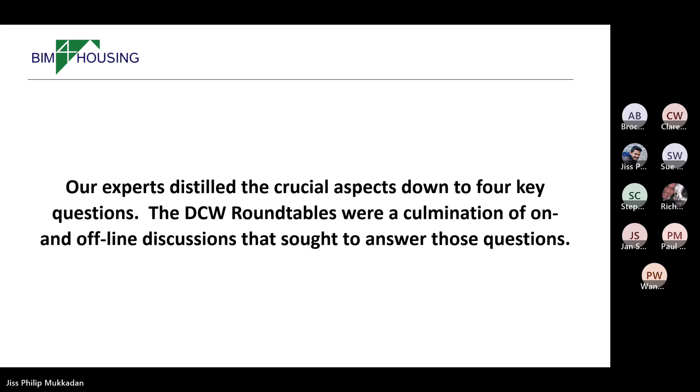Is anyone here at Digital Construction Week? I know you were there, Steve. Was anyone else there on the day? Someone's saying yeah... no I wasn't. Oh good, I was there. Perfect.

It's my screen now. I can see it, that's good.

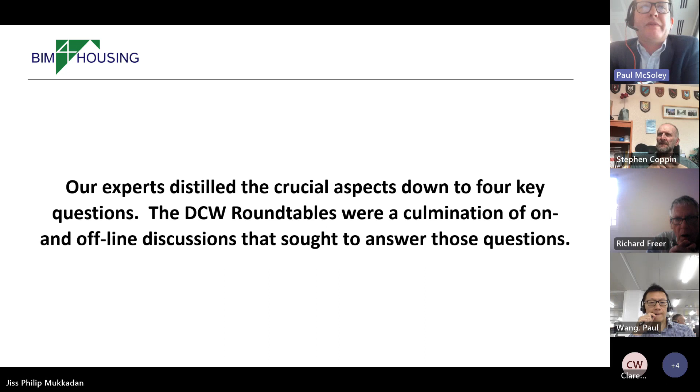So hopefully you got something out of it as well, because I did a little presentation which I'll bring up after we've gone through this, just to give you a bit of a sense of where some of the other stuff's heading. If you go to the next slide, Jiss.

Again, it was how do we prevent incorrect design, selection, installation of fire safety products.

If you go to the next slide again, Jiss, because I'm trying to work with the order you had these in. That's it. You see how different tables - well, there's Paul White's one there. Have you got the table?

Davey's got them here, all the different tables. Yeah, he's got a picture of each table as he comes to the question. Yeah I didn't know if he had. Okay, thank you Richard, just refreshing me. Sorry mate, I'm head down. No, not at all.

Just to be clear, there was much discussion in the pre-DCW meetings, and everything was distilled down to 4 questions, that was it. Each table answered a question. But also there was a lot of input prior to that - we had a survey online that people were filling out. So that has all been distilled into this document.

So this is the table answering the first question - they're the people who were doing it. Sorry Paul, carry on. No, that's all good, because George went through it the other day. Obviously George's not here today anyway, so it's fine.

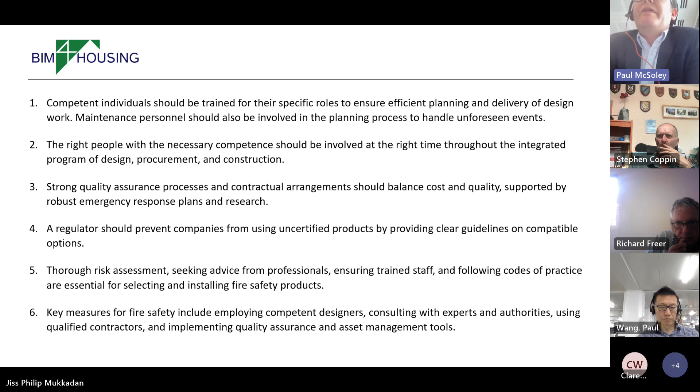Oh it's more here, just go back to the beginning. Oh bloody hell, they've got like 22 outputs. God, go back to the beginning. Yeah, Jesus, a lot there. Go back to the beginning slides if you can.

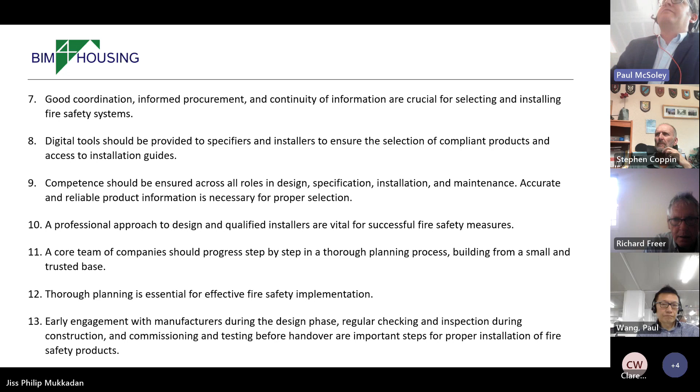That's that one there - how do we prevent incorrect design, selection, installation of fire safety products? One of the things with this is: do we think, as a construction group, that the designers - the architects, the building services engineers, the fire engineers - actually understand the fire safety properties of products in the first instance?

That's the question - not all of them by any chance, without a fire engineer supporting them. Well, even the fire engineers, do you think they understand all the product classifications, the 54 items for a smoke control system they need to classify for products? The answer is probably no. Yeah, I agree, so it's a bit of an interesting dynamic.

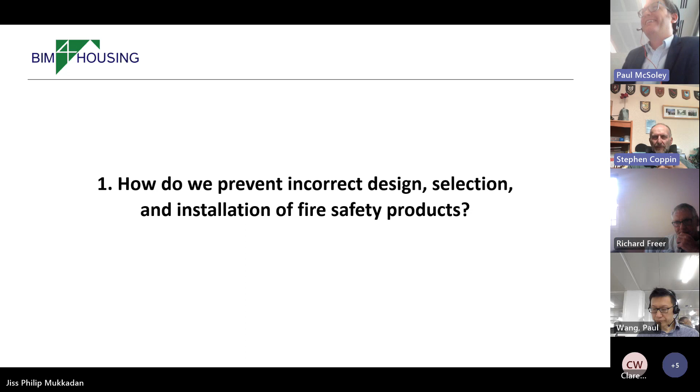If you crack on a bit as well, go forward again, we'll look at the other questions that are there.

So if you go onto the group for this one here quickly - assets should be entered early into the common data environment asset management tool, linking data request information to assets using unique identifier. Understand the information needs of the end user. Implement the golden thread principles, ensuring suitable business systems, process, and clarifying ownership and responsibility around AI.

Yeah, you know, my biggest thing is that if you look at the golden thread for any selection of piece of equipment, it's building risk, space risk, how it's supposed to operate, how it's classified, what wall it goes in, and how you install it before you even get to the quality assurance of the installation part of it. So if all those bits aren't available in BIM, this is the point

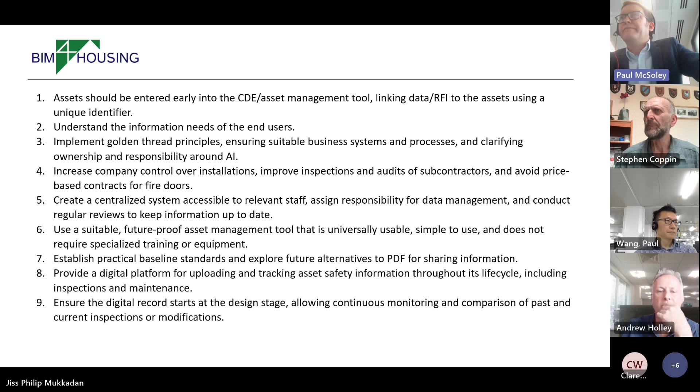If you look at all this stuff around digital records, it's no good taking a picture of something on site and saying that door's installed perfectly as specified, when actually it's been specified incorrectly, or it's the wrong function for the space risk it's doing. All you've done is recorded a perfectly good door in the wrong location.

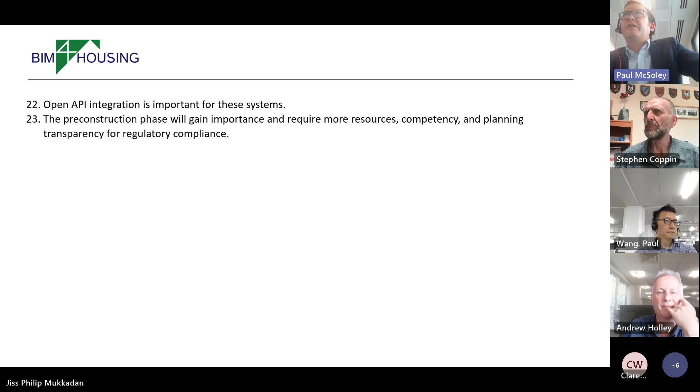Go onto the next question for us. You can all read, we'll get this out. This hasn't been sent out, Richard. We'll send it out, there's loads of things here to read through, and we're not making it into a presentation, Paul. Make it up into a report and get it out to everybody, and as you say, it'll be on the black box.

That's good. If you haven't seen them, we've got the individual product workshops coming up as well. How do we ensure the building safety data is live and not an outdated snapshot in time?

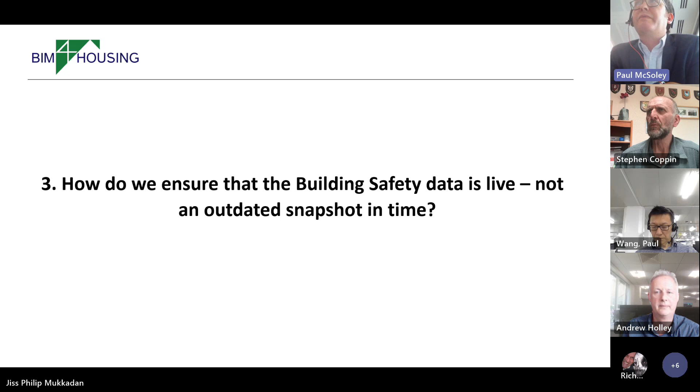If you go onto the table quickly, see who's on that table, just to refresh my brain. Okay, so you've got Candle on there as well, and Scott Brownrigg. Animatic's great anyway, if we don't know it, Anna. If you go to the next page, let's look at some of the output from it.

A robust change management process should be followed throughout the entire project. I'll be frank, forgetting the Fire Safety Act, general change management on jobs isn't necessarily done very well anyway, because when you look at changing componentry to be adequate for the function it's supposed to work against, you can sometimes find the dreaded word of VE comes into change management, going from A to B, but actually A was never right in the first place. So you end up with a B that's hopefully right, but sometimes you end up going to something that's completely wrong, more wrong than the first one. So the change management process needs to be robust, with the right level of competency and input to get it right.

Design a comprehensive soft landing approach. Love the word soft landing, including defining information scope, ownership, and process for updating and managing the information. If you looked at soft landings in relation to energy, it's about how you think the energy was going to be when you purchased the building, so how many kilowatt hours per metre squared, and the reality after is managing that difference between the two, because it's a combination of how you occupy the building.

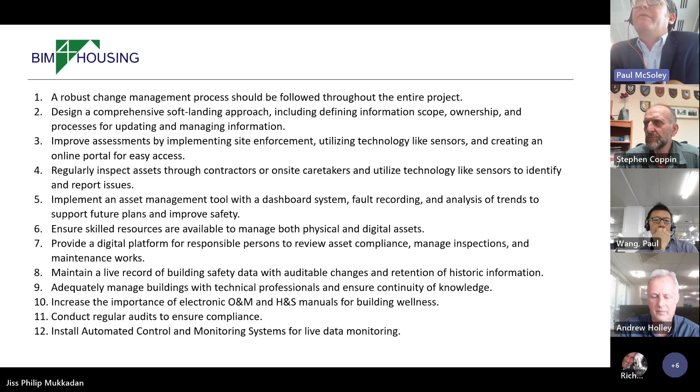If you go to the next question for me, Jiss, because there's loads of these here.

If you go to the next one for me - how do we ensure that the incomplete building services? Does this design not impact construction? I can't get it, is that actually written right? How do we ensure that the incomplete building services, okay, design does not influence - okay, so this is the table I was on anyway. This doesn't read right, building services design, not... it's building services design, not.

Okay, so if you go to the outputs in this, we had design of a building should be complete before construction to avoid mistakes and uninformed decisions. I think we'd all probably agree with that one. Design changes should be minimal to prevent budget overspends.

Rethinking procurement process can help ensure a smoother transition from design to construction. That's what you said earlier, Richard. Everyone says the same thing. You need that specialist help early on in the process, which is no different to what's in the David Mosley report on procurement. Utilising 3D modelling, conducting gap analysis, detailed construction planning, engaging stakeholders timely can enhance the construction process.

Again, 3D modeling can help, but the risk with 3D modeling is that you've got to model the actual functionality of the whole product, all the seals that go with it on the wall, and how the wall works to get it right. Clash detection 3D modeling isn't as simple as the pipes touching the wall, etc. There's a bit more to it.

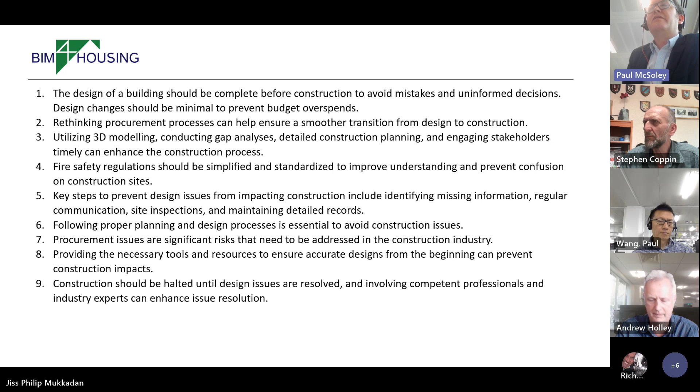Going to the next page, let's see if there's anything else that's been written on there. I don't think there is. Oh, there's a few more. Lack of coordination between build and M&E design can lead to compromise and potential dangers.

And that's probably the big one, because all the products in one wall, the wall must be correct to house all of those products as a system. Not just put a wall in - you've got to make the products work with it, because that just never happens, unfortunately.

And information - someone mentioned on the dashboard - information flow is critical. Do we pass information between the relevant people at the right time to actually understand the decisions that need to be made in like a RACI format, to get to the right decision that you require, because there's different knowledge holders. Again, the complexity of our information is often underestimated.

That's the point I made on the day - when you look at the information required for one door in one location, it isn't just FD30, FD60, or wherever it is. It's a bit more than that. People hear 'doors' but it's more complicated because of the function, the security, and the DDA requirements as well.

So there's a tendency to overvalue the market at later stages of the project process, undervaluing the importance of information and products at the early stages. And that I think is a brilliant point as well.

Has anyone else got any questions on these before I move on? Everyone got any viewpoints? Silence.

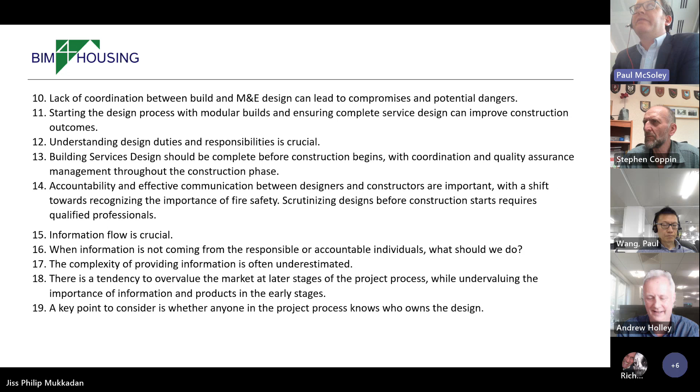One of the things we shared on the day was this. Has anyone seen this before?

I've not seen that before. No? Okay, Paul, have you seen it before as well? No, I've never seen this one before. Okay, so for those who were there, we would have seen this probably on the day as well.

What we're trying to do is, because the questions we asked on the day were written, the responses are really good, and when that report's formulated, Richard, we'll have a good chomp through all of it. George did a diagram originally around the gateway points at the top - when should gateway 1 be, gateway 2, and gateway 3 - because when you look at how the regulator's going to operate, we've all got different knowledge around what the regulators are apparently doing and what their view on the gateway stages are.

One of the big things is they're probably going to allow - it's always been on the government site - phased approaches for handing information over, which to me is probably one of the biggest risks, because how you coordinate all these products together into a system approach is where the breakdown occurs. For me, it's always been about knowledge holders.

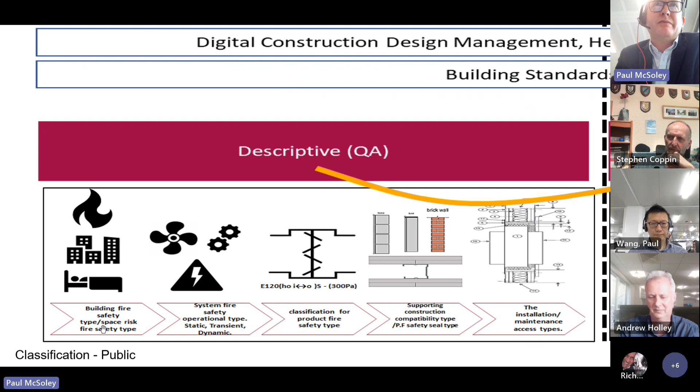To be a bit controversial, I'm not sure bringing the supply chain in fixes all of it just yet, unless you get the data in the right order, because the people that supply these kind of products don't do fire risk of space. So this is the disconnect between those five points, which we've got to try and bring back together.

Then you've got to be able to install it as well, get access both sides, clean it. See where I'm going with this, right? So that is a summation of how you get the quality assurance.

And if you've not done that before you go into Gateway 1, you don't know how it fits, you don't know how to access it, you don't know if you've got risers that are big enough. And these are the common things.

I'm sure, Paul, you'll see it on site, Wang, that you'll get to site and you'll have things like steel beams across compartment lines. They've drawn everything going through the steel beams, and you go, you're going below them, mate. You ain't going through them, because it's different test standards.

So it's trying to get a mechanism to drive all of this out and actually have the BIM data eventually that can support it. But I think we're a bit off yet getting those templates done, because you need sort of cross-industry agreement on it.

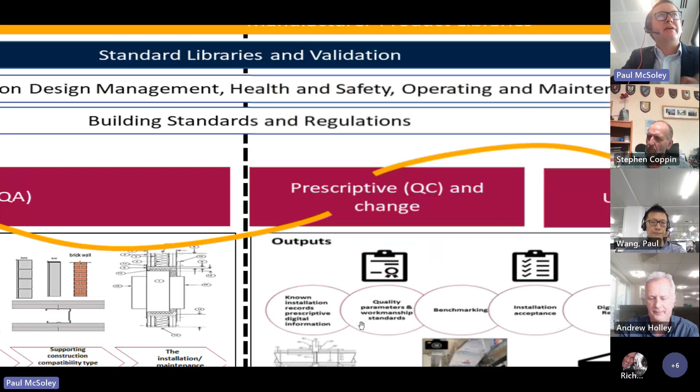But then you look at things like digital records, that's over here, but that's a summation of all of this, isn't it? If I just zoom in a bit, once you know what the product is that you're using to match that, if you go to manufacturing and give them all the information around that, they'll go, this is the product you want to meet that.

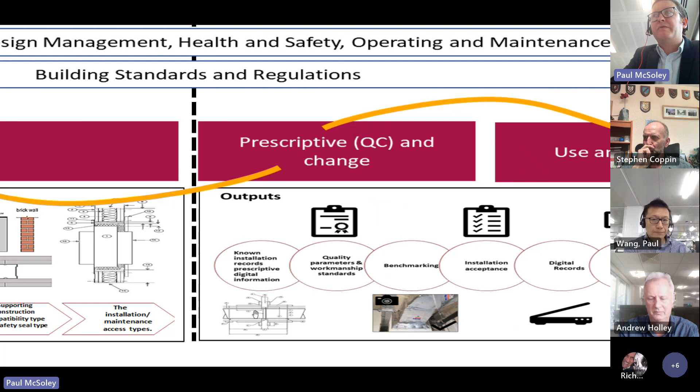Then you've got a known installation prescriptive of how you install it. Then you've got quality parameters and workmanship that goes, you can benchmark it, you can do installation, then you can do a record of actually how it's installed against those products.

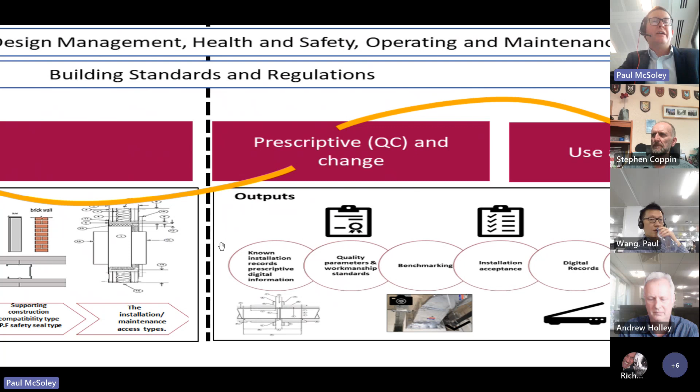That's what we were kind of talking about on the day as well, about how you get to that point. But without this, at this stage, you can't guarantee the fit works, it's the right product, the appropriate space risk has been picked up.

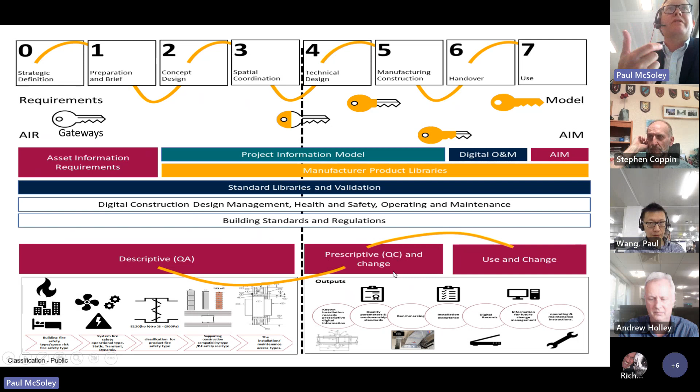We sort of showed it around, like we talk about the change management process, that if you do something that affects this once you've set it to work, then you've got to be in this world of a major change. There's no other way you can kind of look at it. If you change that classification number, that has got to be major, because the ripple effect is huge.

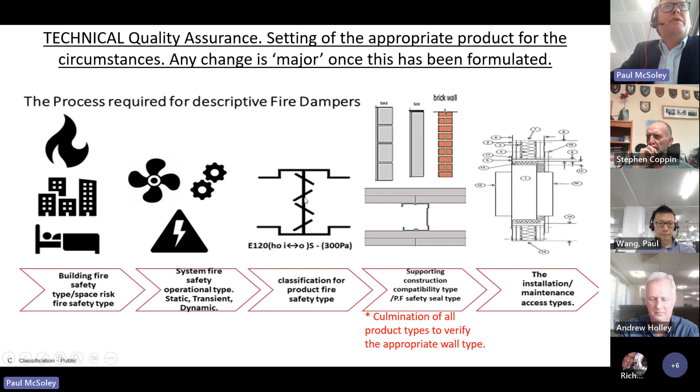Once you've set this around the culmination of the products, you've got to look at the ripple from every single product. So if I display this in a different order, if you set the wall to be brick and block at 140 mil thick around all of these products that go in it, and then you go and change something, you've got to go back and reassess all of this, each one against what you've changed, because unfortunately you might find this affects the product that you've used from the other product types in that wall type.

You mainly see it from drywall to brick, not from brick the other way, to be honest with you. But doors can be a bit of a nuance, because doors have to be tested in both substrates, whereas dampers go from that to that.

Resistant ducts go from that to that, pipe work goes from that to that. Flues, you've got to do both. Curtains, you've got to do both. Busbars, you can go from that to that. So there's all different rule sets around it all. This is the nuance of what we're kind of seeing.

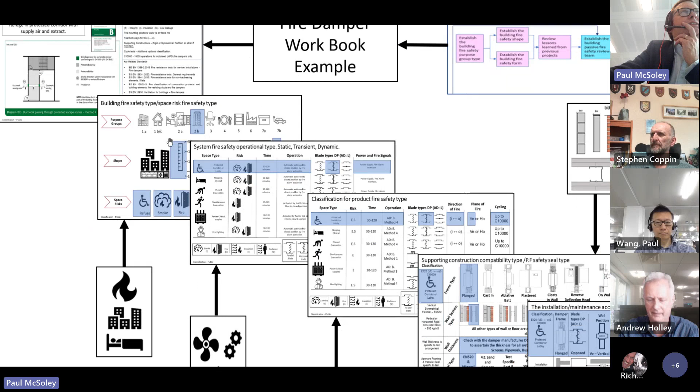We showed this on the day as well. We'll make sure we get this sent out, because this is common knowledge. It's out there from other working groups that are going on. But it was to get a method of helping people and a common process to make things easier to spot about how you handle that information about risk class.

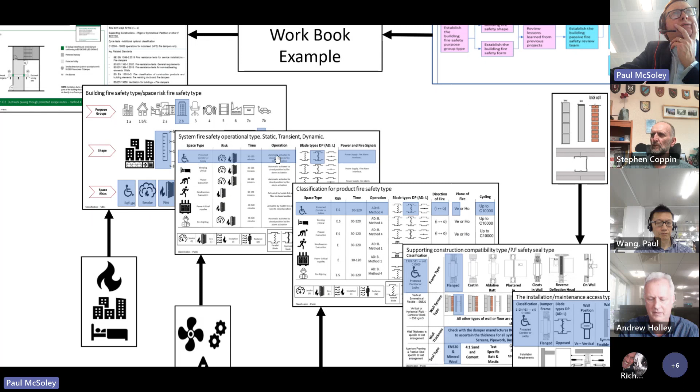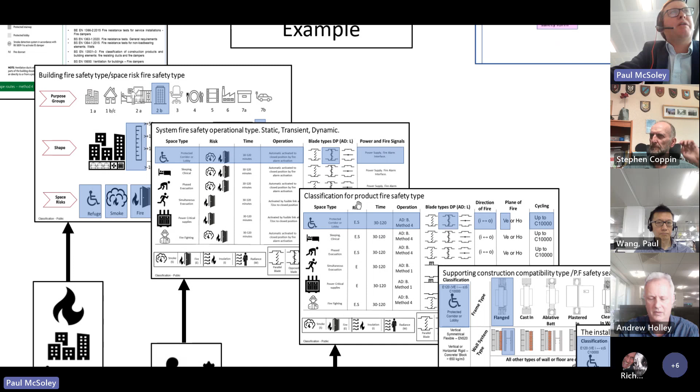What the, if you look at dampers in their inherency, it's all about... Paul, is this your document? Yeah, well, George has got it. We displayed it on the day, mate. You can go in the black box. It's no big drama. Yeah. Do you know what I mean?

But the thing is, what we sort of said is in some of the other industries is that we need a code of practice to get people to handle this information, because as a construction group and a construction industry, I've got a bit of sympathy for architects, building services engineers, fire engineers, and suppliers and contractors.

And I mean, if you look at, we've had another big one that's gone bust recently, haven't we? A big contractor that's gone as well. I forget the name, it wasn't Hill Group, it was a different one. It's just like the endless revolving churn of internal big building contractors that are going under, and it's all going to be in relation to getting wrong products in wrong walls and refitting out and fighting legal cases over it.

So we've got to get to the point where the top understands what they're doing and how they get there. The bottom understands how to verify the adequacy of what they've been asked to install. And the likes of the big contractors in the middle have got a mechanism to help that information get passed around, because I don't think there's one key knowledge holder for any subject, because every subject's going to intertwine at the supporting construction it kind of meets at. So you've got to have a method of doing it.

There's like 7 types of frame types for dampers, and you've got to have a way of installing them. You need access, someone's got to do the seal both sides. You've got breakaway joints, if that makes sense.

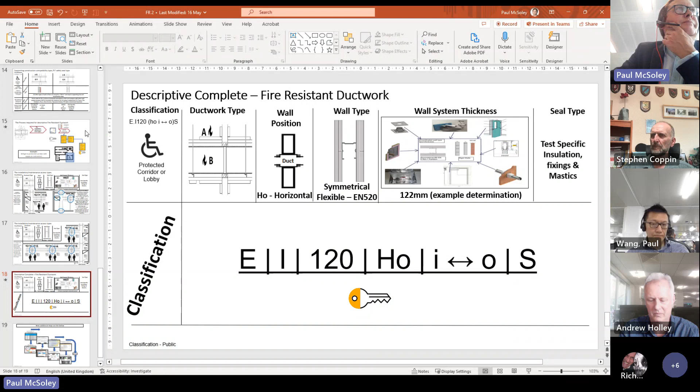It's all different. This one is not out yet, but I'll just show you this quickly because it makes it a bit easier to see. If you take things like smoke control systems, or even fire resistant ducts, you've not got a fire damper at each wall. You've got something that transits through the whole area of the building, if that makes sense.

So you might have a system here, which could be a kitchen extract. It's 1 hour, so you do a 1 hour detail at that wall, but this room's got a 2 hour protected space. That detail on the outside, fire, because it's a type A we've got to protect against in here, is going to trump the type B test there. That's going to be a different thickness of insulation to that room. The wall's got to be the same as the 2 hour wall that's been used for the testing all the way through. See what we're trying to do? We're trying to give people an easy way to do it.

But the big problem with all of these things that we've got, and I think this is where a lot of this information George has got, Richard, anyway. But when you start looking at things like, I can bring this up on the screen quickly, things like smoke control dampers, right?

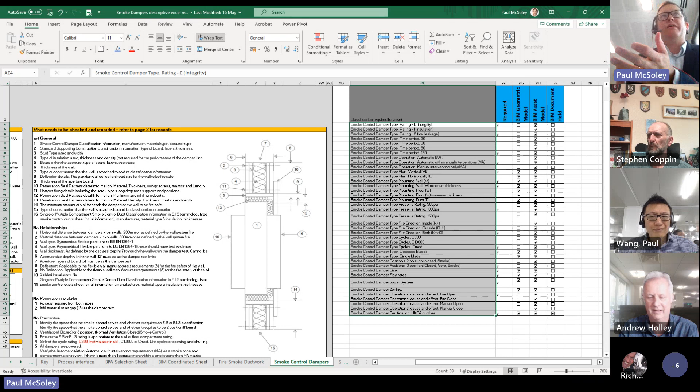That's basically the BIM information you need for one damper in a wall, smoke control damper in a wall. Not just the EIS, you've got to look at what value of what do you want? What period do you want?

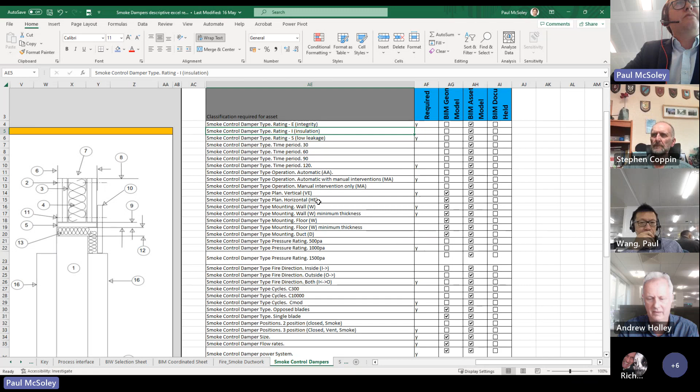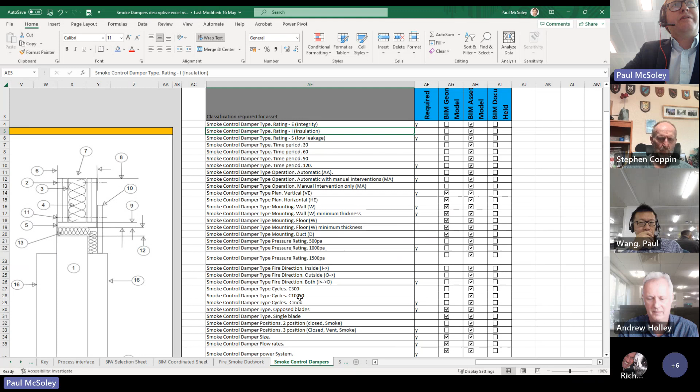Is it automatic? Is it manual intervention? Is it manual intervention only without any sort of switching, which is basically controlled intervention? Is it vertical? Is it horizontal? Is it in the wall? What's the wall thickness? What's the floor thickness? Is it duct mounted? What pressure is it tested at? Is it inside to outside or both directions? Is it C300, 10000, C-mod? What blade types have you got?

Is it single? You've got to get all of this stuff recorded, because it has an effect on the life safety critical nature of the product. You can't take an opposed blade out and change it with a single blade. You've screwed your golden thread already. See how complicated it kind of is. Do you know what I mean? Yeah, so it's not just as simple.

This is why when me and George spoke at length about this - and I'm not quoting George, because you'll probably look at this video and think he's quoting me left, right, and centre - I'm sorry George, but the bottom line is you try and get all this stuff into a template of a BIM. Someone's got to pay to get all this language into a machine readable way where we can agree it. Even the cause and effect of it is important, because some are going to cause and effect open, some are going to cause and effect close. And you've got to record at each location what its function was originally.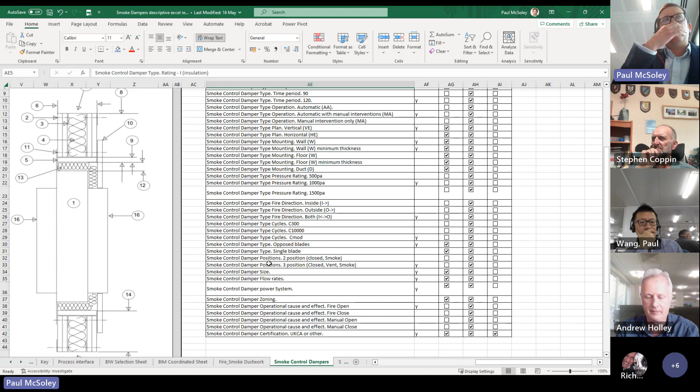Do you know what I mean? There's a lot to it. And this is important because it's about authority of control. All of this is about how you control airflow rates from digital signals. So it's not just as simple as EIR and the rest of it.

If you look at the BIM coordinated sheet in its fullest, we've seen this before. This is probably really mind blowing, but just to give you an idea - this will take a second because it's a bit of a nightmare file.

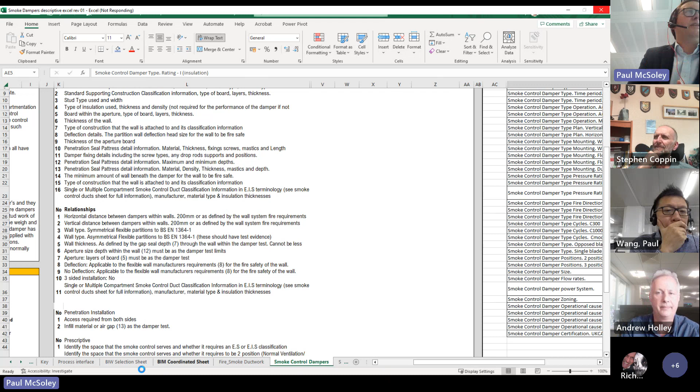Well, Andrew had his hand up. You - oh, can't, sorry, I can't obviously see it. No, I can't. No, that's what I'm saying. Whoever's got their hand up, speak now. Yes, hi, it's Andrew. Sorry, Andrew.

What comes across to me, not from a technical point of view, just an overview, is that at the moment we're looking at products the way they're currently designed. But perhaps because we know it's complicated, maybe there'll be a case where product design will change to allow more flexibility so that fewer errors occur, rather than us trying to work out how to get this very complicated version in and make sure it's right, because it has to be very specific. How much more will this drive change in design, so it makes our life easier when you're trying to pick something.

Yeah, I think Andrew, it's a big point, right? Because you're working for - it's the CH.org, isn't it? What's the CH.org? Yeah, THCH. Okay, Tower Hamlets Community Housing. Yeah, housing. Oh okay, yeah. So I forgot, because I used to deal with Mike Smith and all the guys over the years ago, but I think they're all retired now, actually.

From Charles, yeah. So look, from your point of view, I think the hard bit is that if you're looking after a community asset like a housing estate and you look at BIM, you're probably 3 or 4 years away before all this stuff can get pulled into such a way that you've got assets you can look at and pull it all out and go, actually, just give me one of these to replace that, if that makes sense.

I mean, we do simplify. What tends to happen is, for instance, a builder who's going, blimey, it's complicated to build a high rise now - alright then, we won't build a high rise, let's build 2 low rises. I mean, we make it simpler, because it's achievable, rather than going, let's make it complicated.

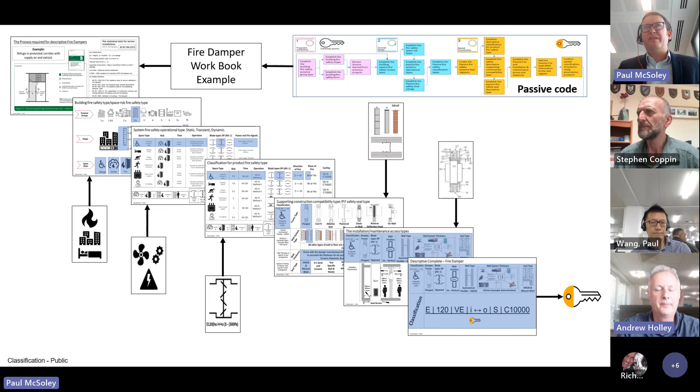So those kinds of questions - I think you're right. A lot of builders say it's getting more complicated because we might need two staircases rather than one. You say we'll shrink them down then, but the point is, if you've got one staircase or two, if you've got an ill-designed smoke control system, it wouldn't matter if you had three. Does that make sense? It doesn't work. I just think I'm not sure having two staircases makes anything safer if the other things around it are wrong. You've got to get that balance right.

So I think you're right in what you're saying - I totally agree. Is that how we give that information to you for your level? You won't be interested in this - you just want to see a sheet that says these are all the key attributes to that product that was installed. If I want to replace it, I just want one of them to replace that.

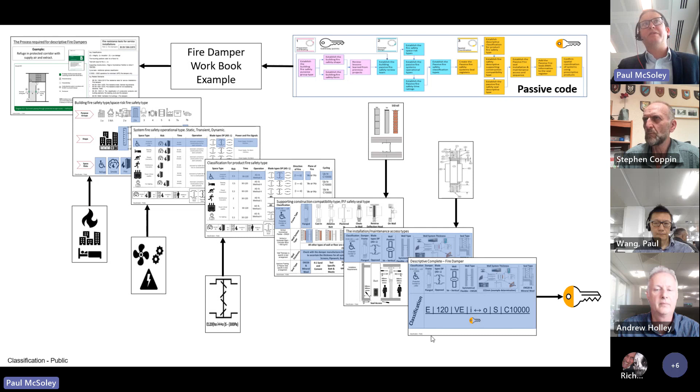Yeah, and that's the bit we're trying to get to, where you have a technical sheet that says give me that number for that location - that's all I want. And the wall type is this, and it's been recorded because you've got it done by summation, just to supply it to me. Because otherwise you can't do the next part of it.

So we did display this because when you look at the top, we've got to get this kind of bit to work better. And some of that is early contractor engagement - I think from that Digital Construction Week it's really important. But I think it's only going to work if we give the right platform. Steve, you'll agree with this - hopefully you're going to save me here - the right platform for those specialists that get brought in to look at it and figure out how do we display the data in the first instance of what you want to see.

And actually, do we know all the attributes of the risk classes of the spaces, can you give it to them? Everyone's then talking in the same language, because at the moment, as you said yourself Andrew, I don't think everybody is talking in the same language. That's part of the issue I'm seeing - the education between all the different disciplines isn't completely aligned.

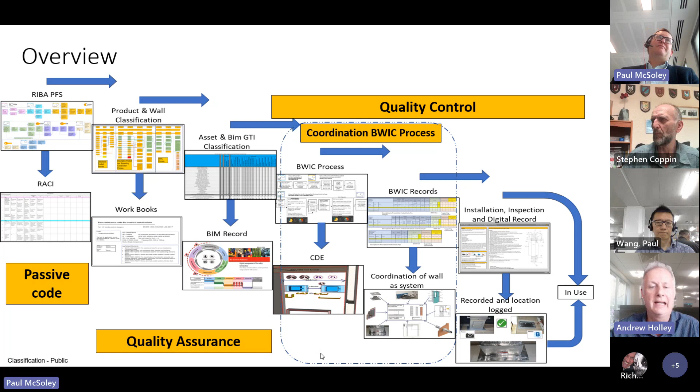Do you know what I mean? It makes sense, but also it's very hard for anyone - you know, you speak to a builder and they hardly understand what a fire alarm is, never mind how a damper works. Everyone is a specialist in their area and relies on other specialists to fill in the gap. So an architect designs a building and says, right, Mr. Fred, can you tell us what I need to put in here, what type - can you tell me what is the best product? And then they say, you want to fit one of these.

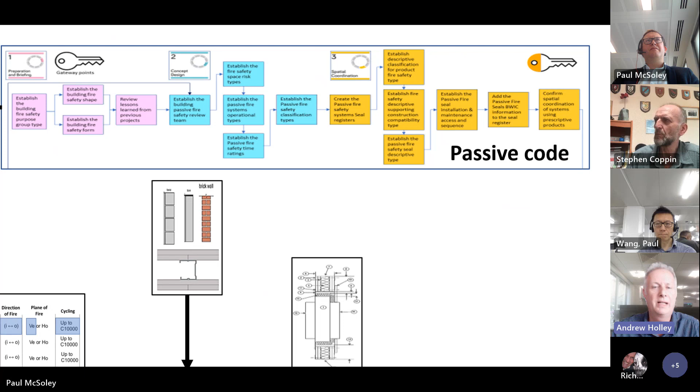But what you said about it being phased - I don't think it is phased. I think as much as possible, everything needs to be designed very much up front so that the regulator can check that everyone's bit of their own kit works with everyone else's bit of kit, which is what you've been saying, so that the changes don't happen too late - and then it's too late to do anything about it because the wall's already been built and it's the wrong type of wall.

So the idea is to get it all done up front and check that everyone else is happy, that no one's interfering with someone else's kit, which is exactly what you're pointing out here. But it has to be done with everyone in the room almost, saying yes, if I change this, that'll be fine. But I think the problem is expecting everyone to understand everything - that's never going to happen.

No, it's not. That's why I think simple diagrammatics make it easier for people to visualize. Even with no respect to the regulators - when we did some of the original consultations with Cantor, they were talking about the skill in building control, and we said, look, the guys I used to deal with - Mike Smith, Eamon Gunn, Stuart Sanford, John Cromwell, I don't know if he's still around - they were getting on in the late 90s, early 2000s.

We're now in 2024. That skill gap's huge, isn't it? Do you know what I mean? So the knowledge probably isn't there around all of these product changes, which essentially kicked in with CPR 2013. The knowledge just isn't there.

So the two entrapments I've always seen: you design a structural building, you put all the steel beams closer to the compartment lines because it's easier for drift, torsion and shear. But actually it doesn't work for compartmentation, so it's inherently flawed because nothing can go through it. These are the bits that worried me, and I've said it openly initially.

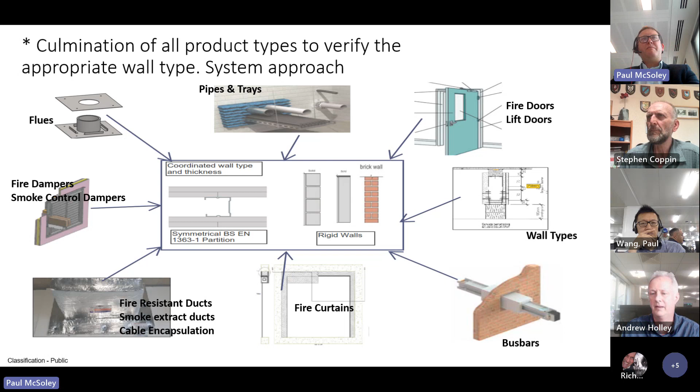That makes sense. That was probably my piece for one day. I'm not going to display too much more because it will just probably bore the life out of you. Unfortunately, I've got a client meeting in just over an hour I've got to prepare for as well, which doesn't help. So I do apologise - wasn't planned, unfortunately, but one of those things you get called into. You can't always stop that pull, can you?

But is anyone else on the call got any questions? Claire, Alistair, Jan?

I think it's kind of clear, but also bamboozled at the same time with the quantity of information that's going to have to be put together on this. I don't think everybody fully understands everything.

I've had conversations about this in the business, saying look, you're heading for digital records, but there's no good just having a record of what's installed if you don't know if it was appropriate in the first place for the combination of all the components and the wall being ample in its own state, not like sliced up like a Swiss cheese.

Because the most annoying thing is when you get bent out of shape, you go around sites, you see bits of board re-screwed here and bits of board re-screwed there, and you go, that's just how they build that in practice in the furnace, isn't it? And they go, no, so it's not representative. You can end up creating more problems if you're not careful.

Yeah, so it is complicated. I see you looking at the screen, Paul. You got any massive thoughts on this? Because I know obviously you're working at Langer Hall, isn't it, Paul? Yeah, thanks. That was a really good presentation, I thought.

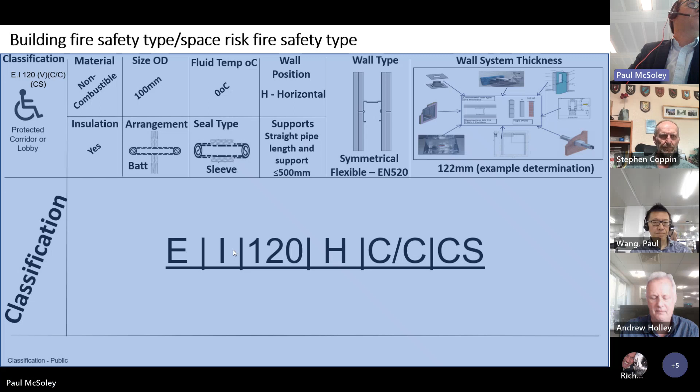It's a bit more complicated than just that number, because the supports, the fixings, the access is still needed from both sides, right? And everyone goes, oh, we can do it from one side, and you go, how do you maintain the vapor seal? How do you prove it the other side? How do you record it? How do you get in there to do it?

And we're actually not - and the problem, I haven't verified this yet with external peers, but the problem is we're boxing ourselves into a corner on jobs rather than saying, I'm sorry, I simply cannot make that work. Not just from an installation point of view, but for future maintenance, for checking seals, for access - because I've seen stuff going up risers like ventilation where you've got fire dampers and they go, no, you've got no access into it after. And I go, there's not enough space to verify the seal or install it.

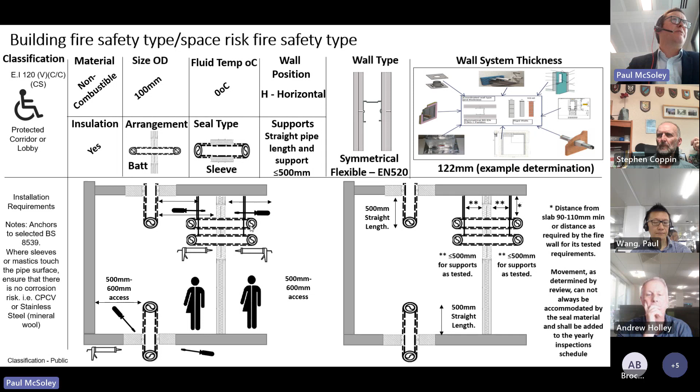I'll do the breakaway joints, and actually, I can't get in there in future to maintain stuff. It's not right, it's wrong, do you know what I mean? So these kind of diagrams help people have that fight, if that makes sense. This is what's kind of been missing for all of these different subjects. And just to say, you look at the system as a whole - what variances have you got in it?

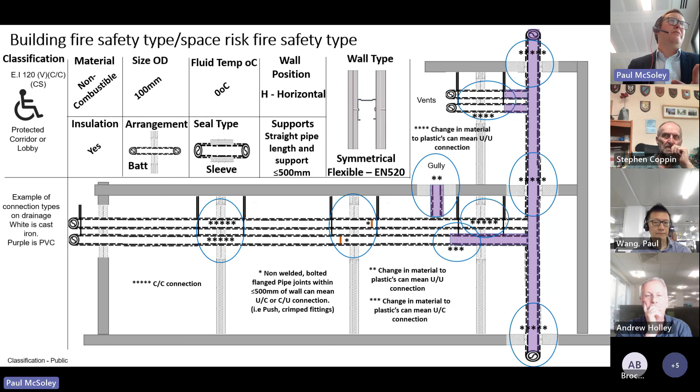Well, what is it we want? What is it that's appropriate to the function of the pipe originally? Part B comes later, see where I'm getting from? It's just looking at it in a slightly different way. That makes sense.

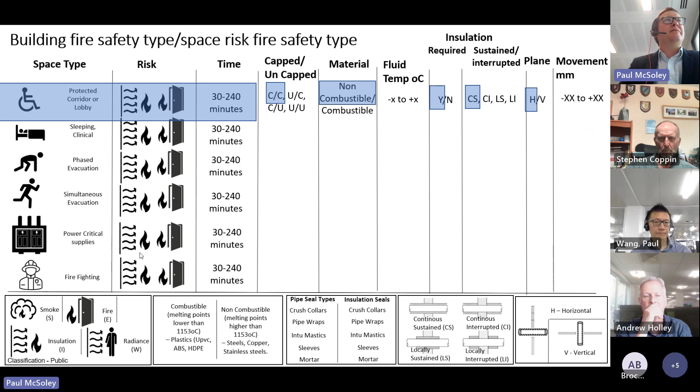Do you know what I mean? But I'm rambling now as well, so I'll stop sharing.

But yeah, we've all suspected it's complicated, and the answer is it is. But I think, as Andrew says, you need it delivered in a certain way for the future. And if I'm doing what I'm doing, I need a way to control the band, conduct it. If you're doing BIM, you've got your work cut out, because they're all interested in clashes, but you try and identify a clash in a rule set - the bottom line is you can't have rule sets around pipe work, because depending on the CS, the CI, the jointing type, the size of the pipe and the bore thickness, it just affects the rule set. It's got to be specific to the condition for which you're doing it.

So if you're doing builders work for this kind of stuff, the worst thing you can do is put it all on the same schedule. You've got to have individual ones for product standards. Then you get the risk category of space and how you put that into practice, then you can compare it against the walls. Because it's a slightly different way - if you mix it all up, jumble it all up, you don't know the wood for the trees, do you?

Right, oh well, listen, I've got to shoot off, Richard. Unfortunately, I don't know if Richard's shot off himself actually, but I've got to go. Has anyone else got any more questions or anything? I mean, it's all valid points, and yeah, obviously I'm telling you to suck eggs here.

Basically, I mean, it's got to have a strong lead designer on the project, engaged by the client early. We've been on about this for tens of years now, rather than be led by individuals who wear a badge and focus on just cost and program, and then say, well, we've got the design team, it's their bag, they can get on with it, but they've got a price to keep within a certain price. That's got to all change with this traditional approach we've been subjected to on massive developments in London - it's got to change very radically.